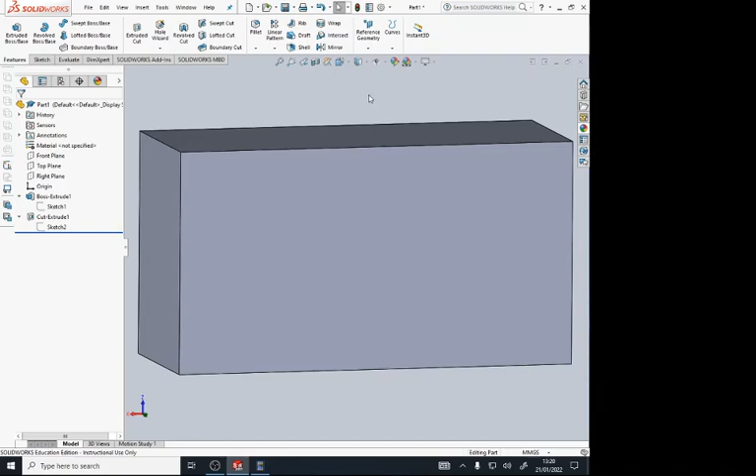So one of the first things we're going to do is create a space for the LED to be poked out of, so the fitting is within the gap in the middle, so you can see the changing light effect happening. Best thing to do now is make sure we've got the right view. We want to work on this face of the cuboid, so click on it, and right click to go to sketch.

We'll now be working here. We want to create a bit of a gap in this top corner, which will allow us to slide the LED in from this right hand side into the fitting, but also ensure we can bend the LED so it gets pushed out in this general shape, going into the gap in the middle whilst the LED circuitry stays out of the way. So we need to do something in this corner to make sure.

We need to create a gap, some sort of exit point for the LED. So we are going to create a hole using this sketching feature, the circle. Click on that, and you need to be precise - make sure you're bang in the corner. Just like before, you get the orange dot telling us we are in the corner. Click on that once and drag out, and you will see a circle forming.

You will see the dashed blue line in the middle, telling you the angle at which you're pulling out. We need to make sure we're going straight down. You'll know you're going straight by looking at it, but also you will see a white box with a black line going down through it, telling us the line is absolutely vertical.

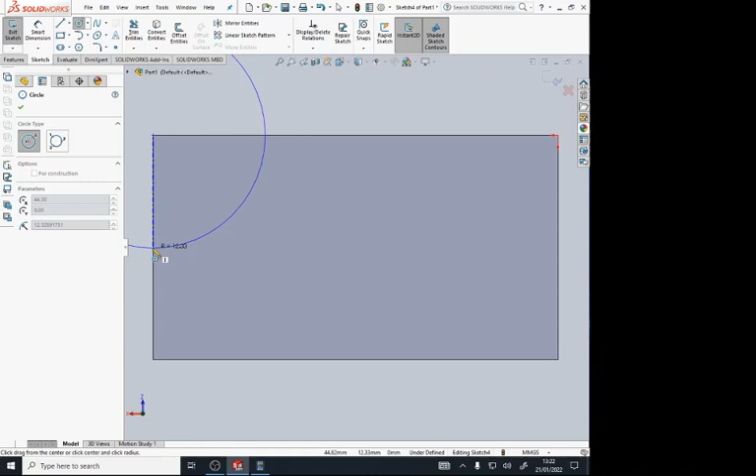Don't worry about the dimension yet, because we're going to change that in a moment. Just drag it down along this edge, click once, and it will drag out to that point. Now we have the option to change the dimension of the circle. You can see the radius is being indicated. I want us to set this to 11.5 for a radius. Press tick, and it will drag it out as needed to create that size.

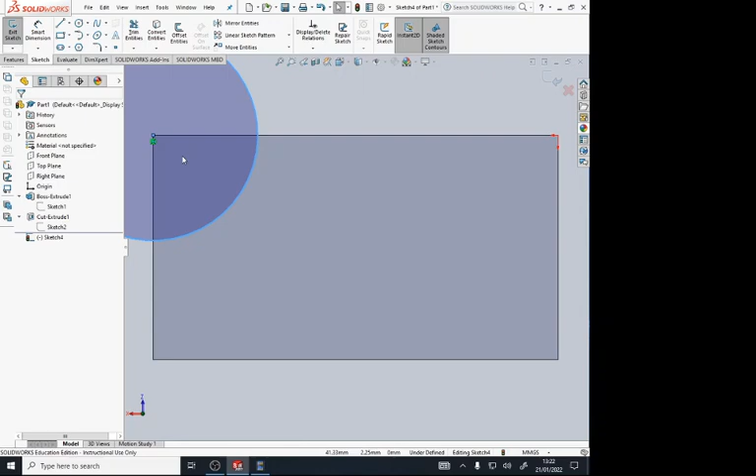Then we're going to create a cut through here, and everything within this circle is going to get cut away and removed from the cuboid shape. Hopefully by this point you'll be familiar with what we've already done - we're going back to features, back to extruded cut, and now it's giving us the option to cut through again. I'm going to change the angle so you can see what's happening.

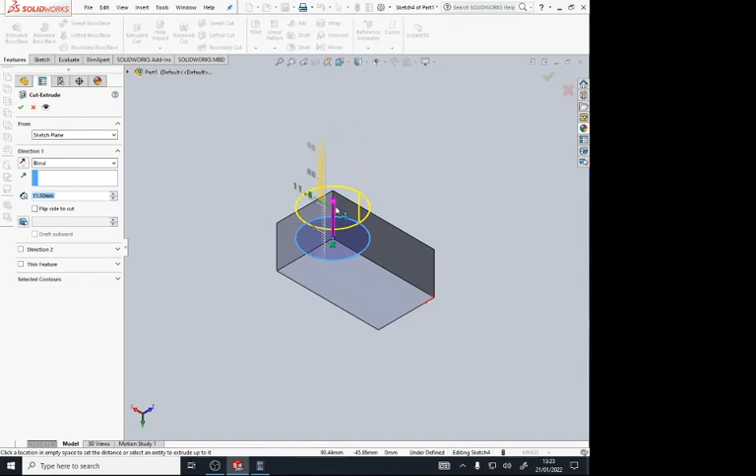You can see the cut that's going to be made goes through the edge of the cuboid we've got. This is a nice feature to be aware of, because hopefully you'll be able to use it in years 10 and 11 when many of you go on to do technology. You can alter the depth of this cut just like before, so it's entirely up to you how deep you need it in future projects.

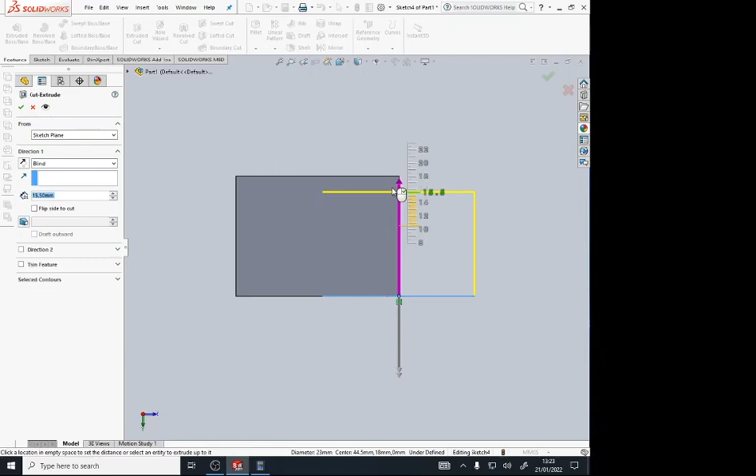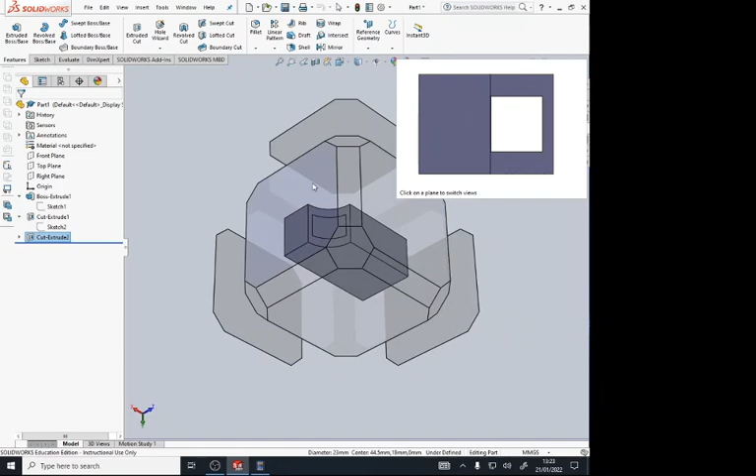In this instance we're going all the way through, we want to get rid of it, so just drag the arrow up so it goes past the other edge of the shape. I'm just going to move that out so we can see what's going on. Press tick - slow computer, there we go. It's taken the material away. If I change the view from which we're looking at it, you can see now there is a gap in the middle which we can use to fit the LED through, so it can still shine through the gap in the MDF and illuminate.

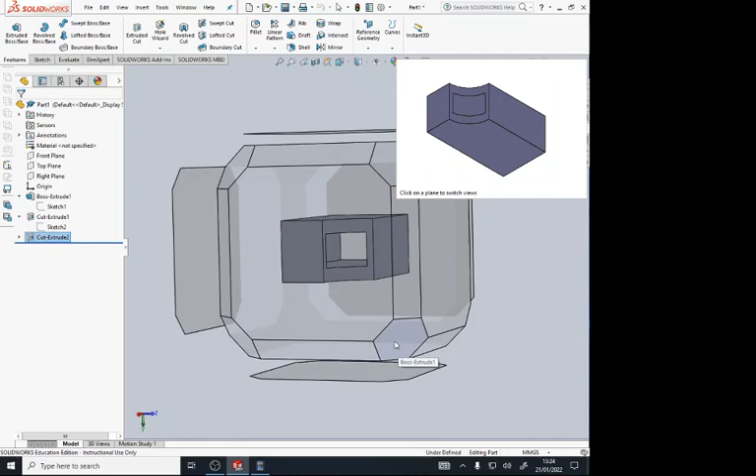So we're looking good, we're getting places now with our piece. We're actually making it look more and more like the fitted piece that we need to be using. Next thing I want us to do is also take away material at the other end of your fitting.

So I'm going to go back to this view here. It's great to be able to fit the circuitry through this edge here, but the circuit board is going to fit in here, and it's going to sit flush with the edge of the gap that we've created, which means trying to get hold of it and pull it out is going to be really quite tricky. So this is us creating a feature which is going to help us. We could very easily just leave it square and say job done, but if we build it exactly how we want it to be, it's going to be a far more useful feature for us. If we've gone to the effort to make this, we may as well make it exactly how we want it to work with the mood lamp.

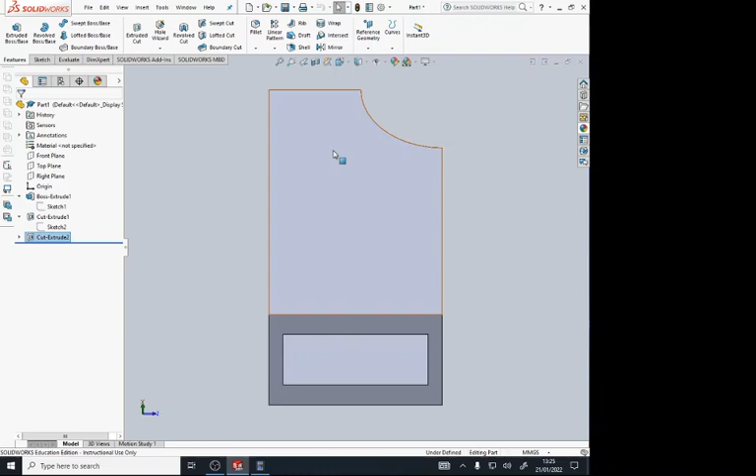So just like before, right click on this face again. Doesn't matter which angle you're viewing this from this time. Press on sketch. I'm going to view it from above because it's definitely easiest. Go back to circle again.

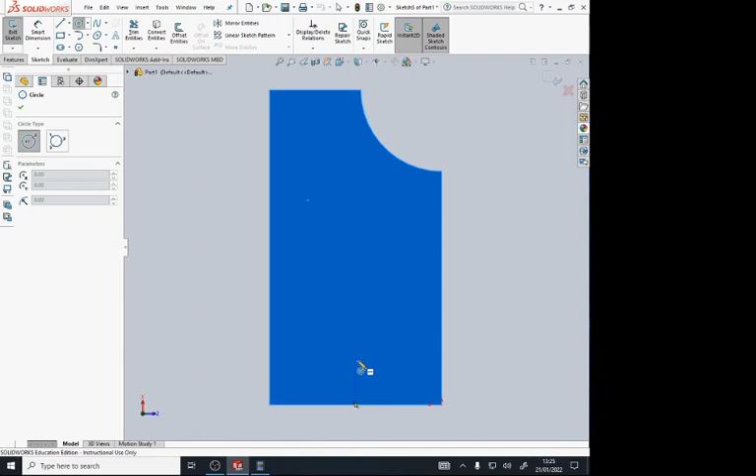Now at this point we've got to be really accurate again. If you get the pencil and pull it across, you'll see this yellow dot, orange when I highlight it, yellow dot when I'm not on it, is showing. You'll also see there's that yellow box with the dash going through it. This means we are halfway along this line. We could make a mark and draw the circle out and adjust the dimensions just like we did at the very beginning, but in this instance it's a handy guide. It will help us out, and you'll see if I move the mouse up that I can make sure if I were to draw a circle in the middle, it's exactly in the middle of this edge here.

Now I don't want that circle, I'm going to get rid of that, just as a demonstration for you, just so you can see how handy these little marks and pointers are for you.

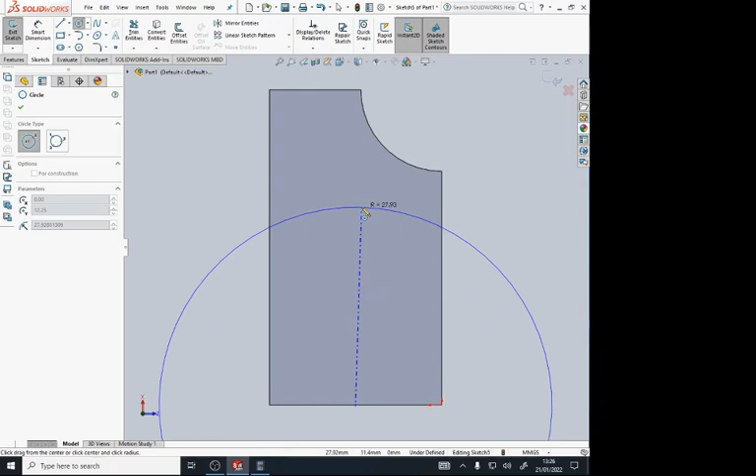Click on that halfway point there, and we're going to drag it out. Make sure you're keeping it vertical. You can see that line is telling us we're going straight. We're going to keep coming out. We could very easily take away all this material, but that wouldn't be useful, it wouldn't leave us with much of a holder left. So we want to make sure it's going just up before it gets to the edge of your fitting here and here. We want to make sure there's still a bit of wall left, so this piece remains strong, but it also ensures that we can get there.

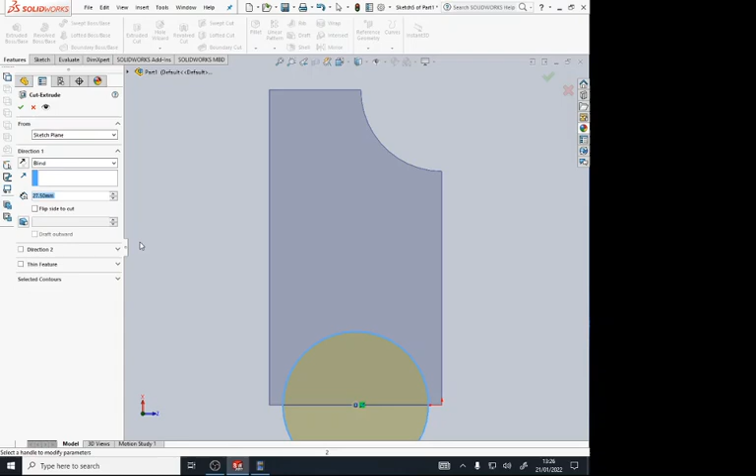Now, if I go back to features and extruded cut, we're going to do exactly the same as we did in that other corner. We're going to make sure this cut goes all the way through the fitting we're building. So we press tick, and once more, if I wheel this back around, you'll see it's created that gap. Now you may wonder why on earth we've done that. Well, that allows you to just get your fingertips in there, allows you to grab hold of the circuit board and pull it out.

I've obviously gone away and tried to make sure this project will work along with Mrs. Keeling and Miss Blackman. What we found is that the circuit board will sit really nice and snugly within this fitting, but it can be tricky to get out. What we don't want to do is use something like pliers to grab hold, because that risks damaging the circuit. So by creating this gap, what we've ensured is that this is a really nice fitting which is usable. It protects the circuit board, but it's still a usable product.

We can get our fingertips just in this gap here, grab the edge of the circuit board and pull it in and out as we need. So that's why we've done that. That will work really nicely. It's just going to add another feature, another aspect of this piece, this project, which is making it far more user friendly.

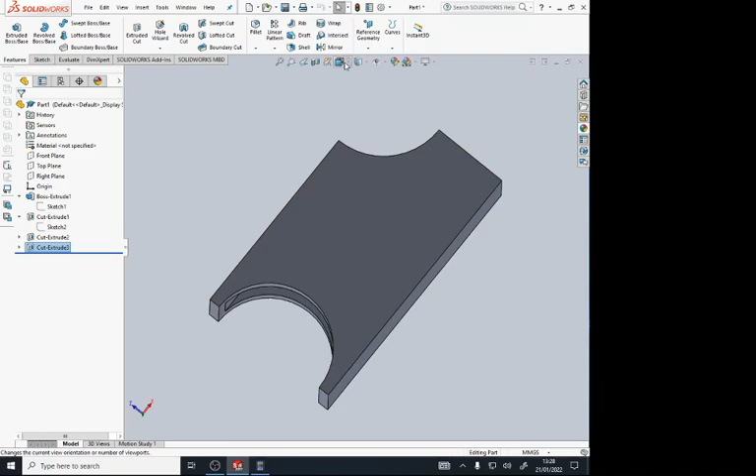So in terms of building this piece, we are basically there. Final thing we want to do is just tidy it up and make it look a little bit neater, a little bit smarter. So that's what we're going to do in the next video. Again, if you need to go back over anything, watch again, absolutely do. And then next time round, I'll show you how we're going to finalise and finish this piece.